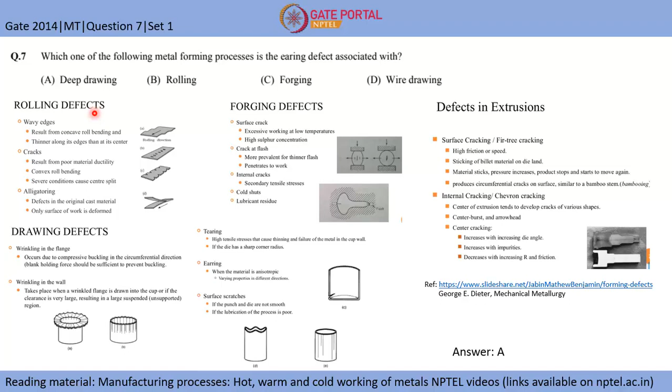Do you have any doubts regarding the defects of all the processes? If you learn this slide, it will be better - any defect question, you can easily answer using this slide.

Any doubt regarding the defects related to manufacturing processes? No, sir. Okay, most of you, 2-3 people, already answered A, deep drawing. So this slide will help you know all the defects of all the manufacturing processes, and will help with another question on manufacturing defects if asked.

So what I will do now is project a second question and you try to answer that, then we will go through the solution.

This is based on Chvorinov's rule. I took one question in my previous lecture regarding Chvorinov's rule. I will go back to that question, so I can tell you what kind of permutations and combinations they can do on one aspect or one scientific rule.

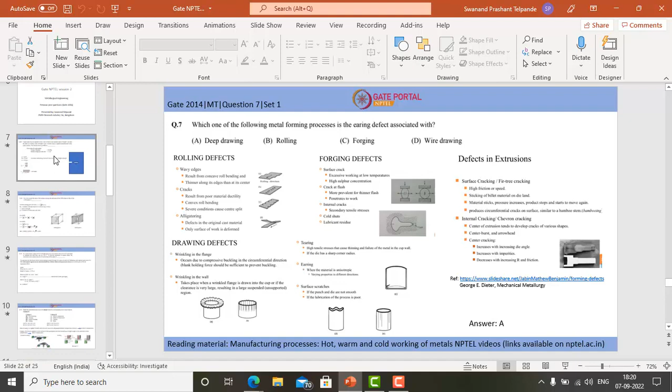Here what they had asked is for a casting of cylindrical aluminum bloom having a length and dimensions of the cylinder given, and you had to calculate the approximate solidification time using the same rule. So we had solved this question previously where you calculated the volume of cylinder first, area of the cylinder first.

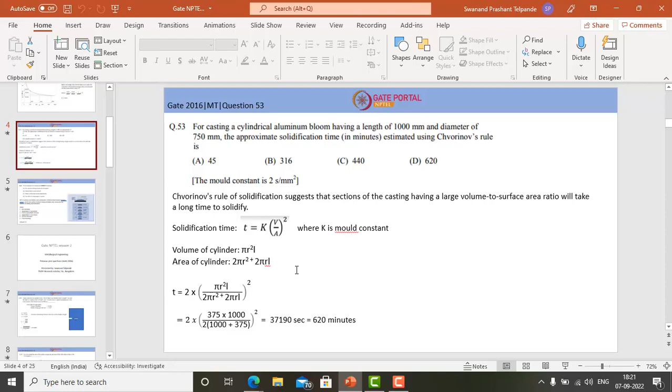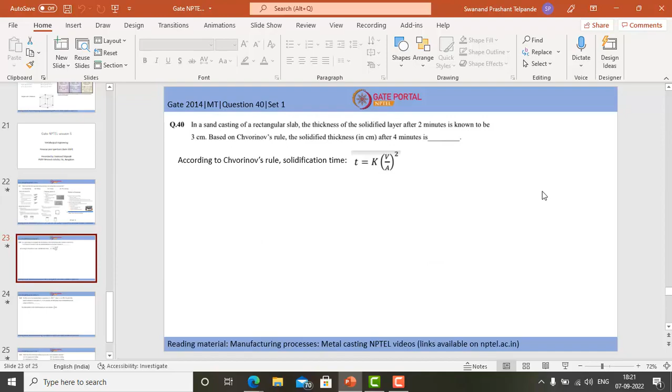Now in here what they have asked is, basically they have given that the thickness of solidified layer after 2 minutes is 3 centimeter. Now what will be the solidification thickness after 4 minutes? So in 2 minutes the solidified layer is 3 centimeter, in 4 minutes how much will be the thickness?

So this is the difference, on the same concept they can ask in different manner. That's all they have done. So if you know this formula you can solve both the questions based on this rule. If anyone has answered, then we can solve it here only. Okay, let's begin with the solution.

This is question number 40, GATE Metallurgical Engineering 2014 question paper. In a sand casting of a rectangular slab, the thickness of solidified layer after 2 minutes is known to be 3 cm. Based on Chvorinov's rule, the solidified thickness in centimeter after 4 minutes is?

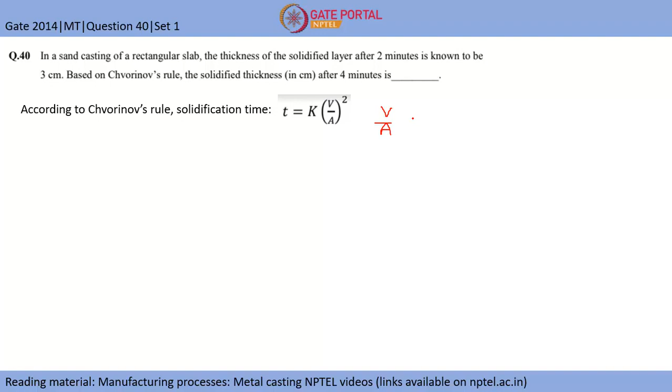According to the Chvorinov's rule, the solidification time is basically T is proportional to V by A square, and K is the mold constant. So basically V by A is proportional to thickness. So we can assume that T, which is time, is proportional to thickness square.

So what is given is, in 2 minutes 3 cm solidifies. So we have T as 2 minutes. Let's consider T1, which is time, as 2, and the solidified thickness I will name as D, not T. D1 is 3 cm. So we have to find out D2, where T2 is given as 4 minutes, and we have to find out D2, how much the solidified thickness is there in centimeter.

So basically we will divide this. T1 divided by T2 is basically, I will write first D1 divided by D2 whole square. Mold constant will remain constant, so it will get cancelled. So it's 3 by D2 whole square, and T1 by T2 is 2 by 4, which is half. So 0.5 is 3 by D2 square.

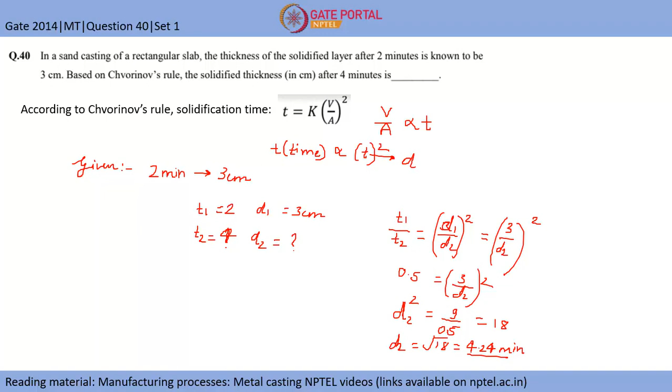Any doubts regarding this question? Yeah, Manikam is right, 4.24 centimeter.

Could you correlate that V by A can be proportional to thickness of solidification layer? If not, I will give you one example. If it is clear, then we will proceed to the next question. How can V by A be correlated to thickness? Okay, if it is clear, then I will project you the third question. I will give you 2 minutes time, then you can answer that.

This is again from extrusion, mechanical metallurgy, where the true stress equation is given and you need to find the ideal plastic work of deformation per unit volume in the extrusion process. I will give you 3 minutes.

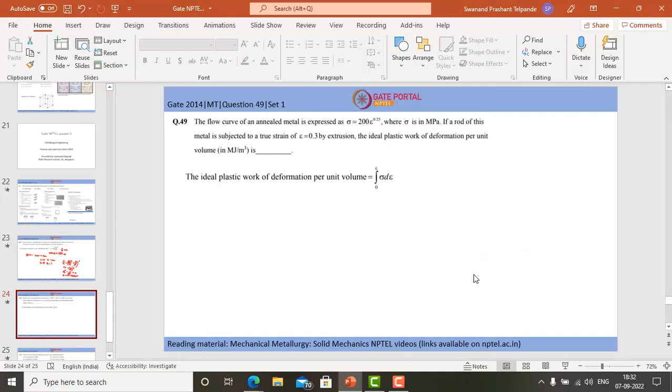Basically, I won't touch on any question related to thermodynamics, that is taken care of in some different sessions which other guys are doing. So if you can read a few things before coming to the Wednesday session, that will be helpful for you regarding these topics. Okay, we will go to this question then, and we will try to solve this question.

I will solve it in front of you only, so you will know how much time it takes to solve this question.

This is question number 49, GATE Metallurgical Engineering 2014 question paper. The flow curve of an annealed metal is expressed as sigma equal to 200 epsilon raised to power 0.25, where sigma is in MPa. If a rod of this metal is subjected to a true strain of epsilon equal to 0.3 by extrusion, the ideal plastic work of deformation per unit volume in MJ per meter cube is.

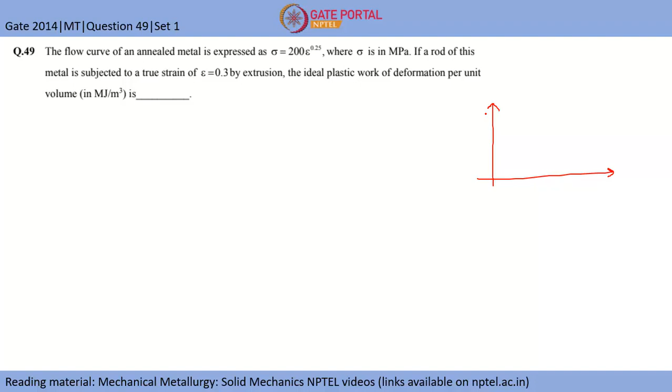So consider that this is your true stress strain curve. If you are deforming a material, you are imparting some energy.

So this equation is given, which is sigma equal to 200 epsilon raised to power 0.25, which is basically the Hollomon equation. If you have learned this equation, it is K epsilon raised to power n, where K is the strength coefficient and n is the strain hardening exponent.

So we have to calculate using this, like extrusion, till 0.3. Let's say this point is 0.3. So the ideal plastic work of deformation per unit volume will basically be this area. So we have to calculate this area.

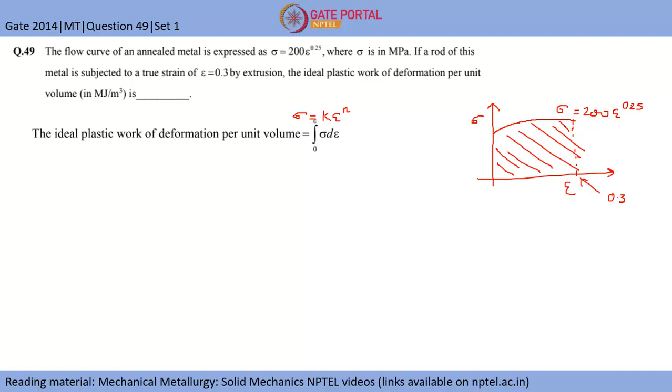So how we can calculate is, the ideal plastic work of deformation per unit volume will be the area under this curve, which we can integrate from 0 to epsilon, and epsilon's higher value is 0.3. So this will be the integral from 0 to 0.3.

Of sigma, we know this equation, so I will directly write it: 200 epsilon raised to power 0.25 d epsilon. So this will be 200 epsilon raised to power 0.25 plus 1, divided by 0.25 plus 1. This is the basic integration formula I have applied.

So this will be 200 divided by 1.25, epsilon raised to power 1.25, and we know the value of epsilon which is 0.3, from 0 to 0.3, so no need for subtraction. So it becomes 200 divided by 1.25, times 0.3 raised to power 1.25.

So I will calculate it. 200 divided by 1.25 is 160, into 0.3 raised to power 1.25, which comes out to be 35.52 MJ per meter cube. So this is your final answer, 35.52 megajoule per meter cube.

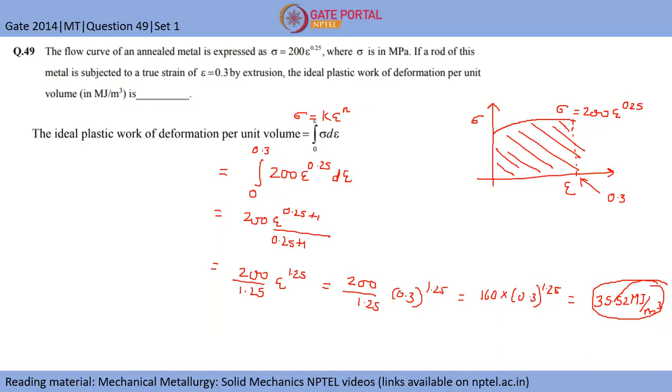Is it fine? For the same case, in toughness we also calculate, yeah. For the same case, in toughness also, yeah, toughness is basically the area under the curve.

The work done is basically the energy you put in, right. The plasticity is because of the energy which you give into a material. And in extrusion, what happens is you have a block and you are pushing that block through a die. So the amount of energy you are imparting gets used in two different things. If there is no friction, then you are not working against friction. Let's say it is a frictionless die. Hence, the amount of energy which you impart through the die will directly result into the plasticity of the material. So the area, the amount of energy I am imparting, corresponds to the area under the curve, which deforms the material.

So from this we can know that the area under the curve will be the ideal plastic work. That's why this word 'ideal' comes in, because if the die is frictionless, then only ideal applies. Otherwise, some energy will get consumed in working against friction. I hope you understand that point.

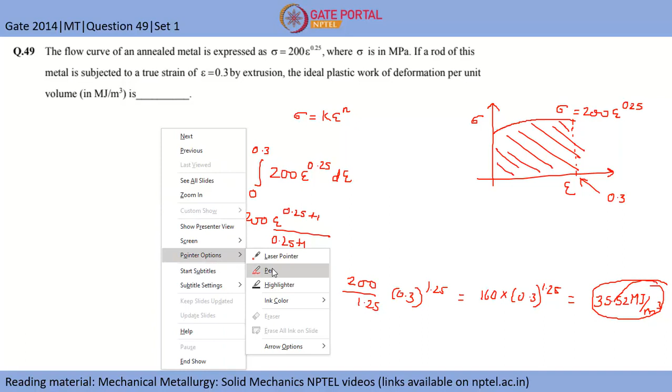I hope you know how the yield stress is calculated. If I have an engineering stress-strain curve, it will go like this. At 0.2, this strain will be 0.002. If you replicate this here, it will be near about this only, so we can assume it to be like it is not there also, and the curve will be like this only.

I hope you got that point. Yes sir, why have we taken this? Okay, so this curve will also be like this only. I have shown the plastic behavior regime only here, so let's consider these two things.

So I have a stress-strain curve like this. This will be my elastic work, which is usually called resilience of the material, and this whole area which comes will be given by toughness. So if you consider this area and you consider this large area, which is basically like 0.3...

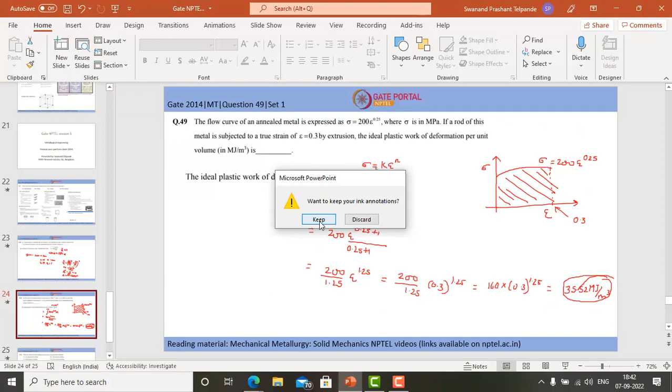So coming to the final question of this session, I will just project it. This is the knowledge based question regarding electrodes. Which one of the welding processes uses a non-consumable electrode? If you have studied all the welding processes, you can easily answer this. Just refer to metal joining NPTEL videos, you will get all the joining processes there.

Answer this in 1 minute, then we will just go through the basics of all these four processes.

Okay, we will start with the solution. This is question number 22, GATE Metallurgical Engineering 2014 question paper. Which one of the following welding processes uses a non-consumable electrode? Option A is gas tungsten arc welding. Option B is gas metal arc welding. Option C is submerged arc welding. Option D is flux cored arc welding.

So here you can see I have described all four processes. First is gas tungsten arc welding. Here the tungsten electrode will be there and you will have a filler rod coming in near the joint region, and you will have some arc here, with shielding gas protecting this arc and the molten weld pool from the outside atmosphere so it does not get contaminated. So this tungsten filament is non-consumable because you are using a filler rod here, which melts and forms the weld pool.

Whereas in other techniques, in gas metal arc welding, this electrode wire is getting consumed, and shielding is done using shielding gas, hence it is known as gas metal arc welding. In submerged arc welding, the mechanism remains the same, you have an electrode wire, however no shielding gas is used, instead the fused covering flux protects the weld pool from the outside environment.

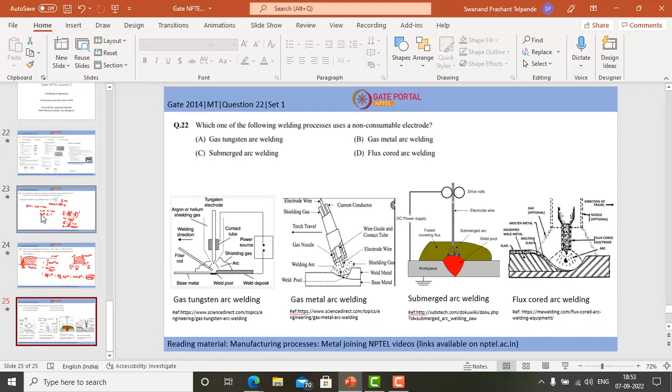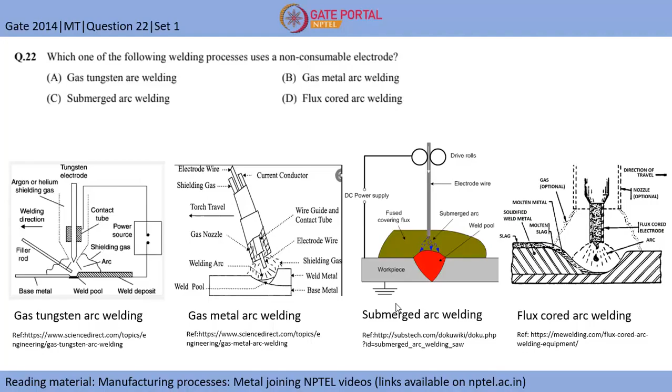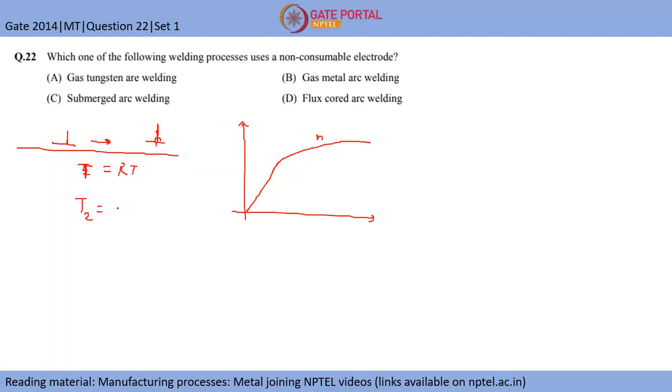So if a gliding dislocation encounters this dislocation, these two dislocations will interact with each other. This dislocation cannot easily surpass this dislocation. Let's say this is at room temperature, T. Now take case of T2, which is well above room temperature, let's say 500 degrees Celsius.

Now this dislocation has enough energy to surpass this dislocation, either by dislocation climb or by cross slipping. You know dislocation climb and cross slip, right? Yes sir, yes sir.

So from this plane it needs to go to another plane where it can again start gliding. Either it can move out of plane by dislocation climb, which is a temperature controlled phenomenon, or it can just cross slip and move.

Hence this plasticity. So let's say at room temperature, the stress required for this dislocation to go around the other dislocation will be higher because thermal energy is not there. In this case, it already has a certain amount of thermal energy, so the sigma required for this dislocation to jump or cross over the other dislocation will be less.

So what will happen at this point, this curve is at room temperature. Now this will be like this, because you require now lesser stress. You require lesser stress for plasticity to occur.

Hence the flow stress, when you increase the temperature, the flow stress is basically where more number of dislocations start moving in the material. Till this point, till yield point, no plasticity is there, hence your dislocations are stationary. As soon as this stress is reached, the dislocations start moving and you get plastic deformation.

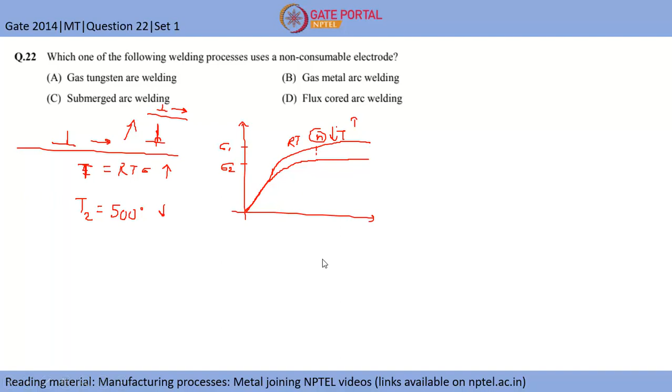So let's say this is at room temperature and this is at higher temperature. That's why less stress is required for plastic deformation to take place, because of the thermal energy component with the dislocation. Hence your strain hardening exponent decreases with increasing temperature. That is basically the funda. Yes sir, got it? Yes sir, I got it. Okay, any other doubt?

Let's say I am at cryogenic temperature. So this dislocation and this pinned dislocation, coming back to the last example, at cryo temperatures this dislocation won't move even if the stress is very high. So if this dislocation doesn't come near this one, then no interaction will take place. Interaction doesn't mean you are doing strain hardening. Basically interaction means if this dislocation is going in this direction and an opposite sign dislocation is here, they will interact and come to the same point, and this will annihilate. So it doesn't mean interaction causes strain hardening. It is not like that.

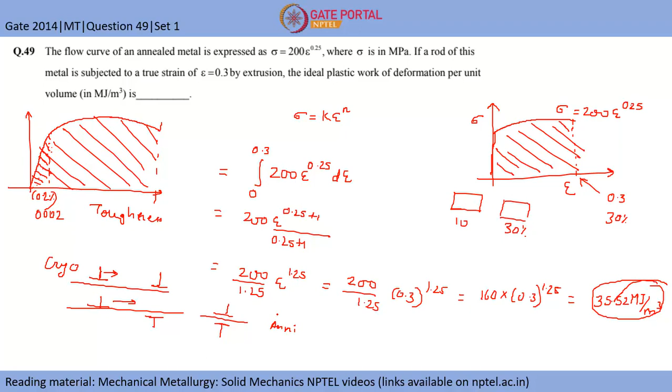Okay sir, but I have studied in the metallurgy data book that the reason for strain hardening is dislocation interaction, and if dislocation interaction is more, strain hardening will be more. No, that's why I was asking you - that was a basic thing. When you study mechanical metallurgy later in MTech, you will understand. Annihilation is also dislocation interaction. On a broader aspect, if precipitates are in your material, dislocation will interact causing strain hardening. But this is also some kind of interaction - opposite dislocations will interact, come just above and below each other, and annihilate, meaning overall dislocation density comes down because of interaction of dislocations.

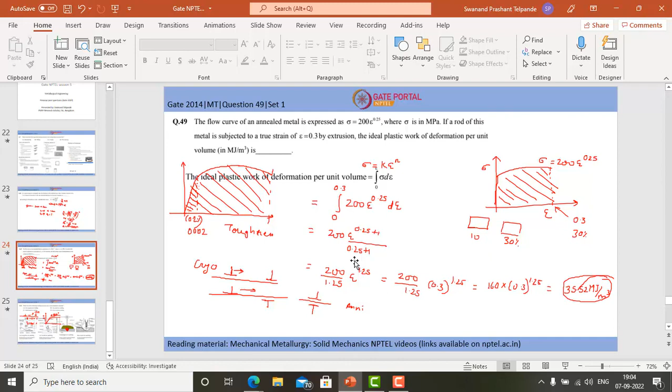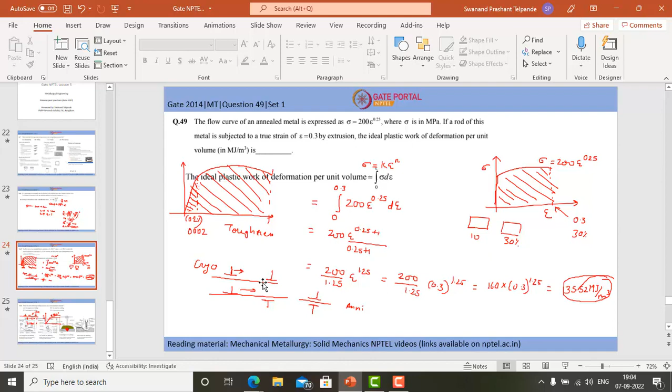So sir, when a sessile dislocation repels the motion of another dislocation, what should we call this process? Again, we have one sessile dislocation which repels the motion of a glissile dislocation - let's say this phenomenon. So if a sessile dislocation is there, it becomes an obstacle to the dislocations moving on the slip plane. Exactly. So sir, what is the term for this phenomena?

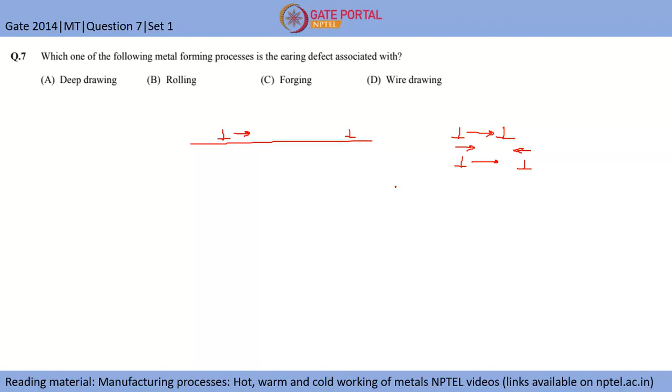Rather, it is not a single phenomena - it comes in the broader domain of interaction of dislocations, where a moving dislocation can encounter a static dislocation, or encounter a dislocation moving in the opposite direction, meaning it has a negative sign. So there are different types of interactions, so we cannot term this specifically - you can just say a dislocation coming towards an obstacle, that's all we can say. And if you have studied interaction of dislocations, you may see jogs will be formed, kinks will be formed - kinks form on the same plane, jogs form on a different plane. These details will be given, so you can study that.

Okay sir, thank you sir. Any further doubt? No, sir.